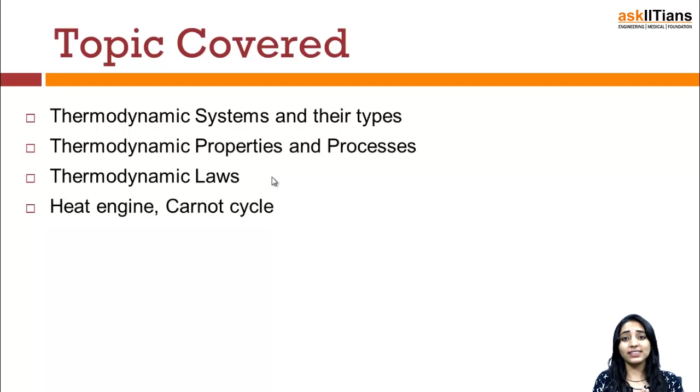Now, after studying the laws, we'll study something of practical importance to us. And the stuff of practical importance covers the heat engine and the Carnot cycle. So now, as I have given you the details of whatever I'm going to discuss in this chapter, let me begin with the chapter.

So here comes the first part of the chapter, where we are going to discuss the basics of thermodynamics. Let me first of all tell you that thermodynamics is made up of two words. One is thermo and the other is dynamics. Now, thermo, as we all know, is related to thermal energy.

Thermal energy, again, at its core comes from something known as heat. And dynamics means flow. So dynamics actually means power; if I take the dictionary meaning, dynamics means power. So thermodynamics is basically that branch of science where we discuss the flow of heat change.

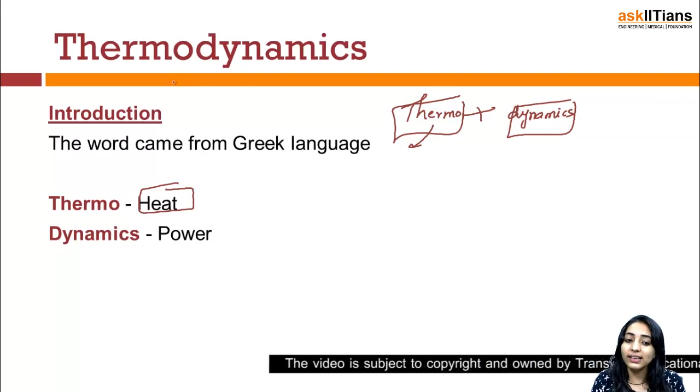Like how heat can be given into the system, and how heat can be given out of the system. This flow of heat into and out of the system is what is dealt with in thermodynamics. Now since we have covered the basic definition of thermodynamics, let me define system, surroundings and boundary.

Now as we know, to discuss any wide topic, we need to start with the core basics. So the core basics of thermodynamics deal with the system, the boundary and the surroundings. Let me take an example. Suppose there is a cup containing some coffee.

Now, if I say that the cup has got some coffee and I ask you to find out what is happening in that cup of coffee, that means I'm not concerned about what is happening outside the cup of coffee, like what is happening here. So if that is the case, I will say this cup of coffee is the system.

So that particular part of the universe which is under consideration for thermodynamic study is what is known as thermodynamic system. Now, the entire part of universe except the system is what is known as surroundings. So, I can very easily write that if you have a system and if you have surrounding, and if you are taking into account both the two things, this is what is known as universe.

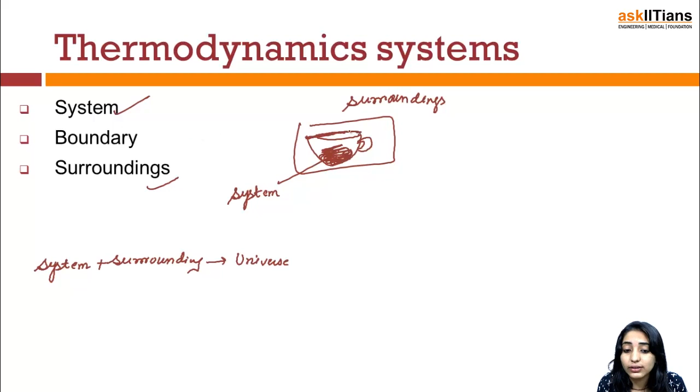That means if I try to divide the universe into smaller sections, I will say that part of the universe which is under thermodynamic consideration is called system. The part of universe other than system, which we are not concerned about whatever are the heat changes taking place, this is known as surrounding. Now, the phase which is actually separating the system from the surrounding is known as boundary. Now this boundary can be real, it can be imaginary. So we'll discuss more about boundary in the further coming slides.

Let me move ahead. So as I have taken the example of a cup, here also, for example, there is a system. You can consider this system as a cup of coffee. So what can happen is either in the system you can put some energy, or you can take out some energy from the system. You can do the entry of matter into the system. You can do the exit of matter from the system. That means either heat or matter can be either added or removed from the system. So these are the different kinds of work being done in the system.

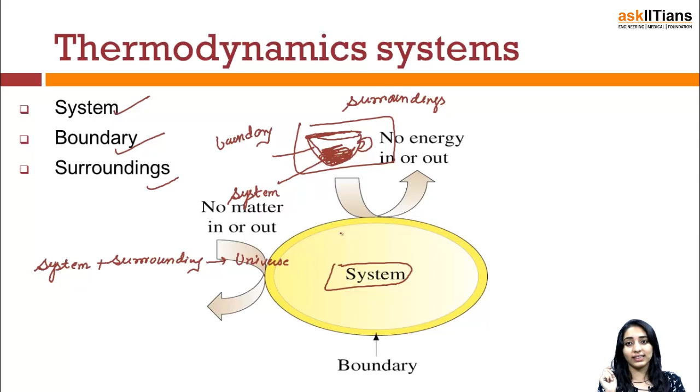Now if I move ahead, let's define what we mean by system. So as I told you in the previous slide, a thermodynamic system is defined as a definite space or a definite area on which the study of energy transfer and energy conversions is made. This is what I have discussed in the previous slide. What is boundary? The system and the surrounding, as I told you, are separated by boundary. Now the boundary may be fixed, or it may be movable, or it may be real, or it may

be imaginary. If I am talking about imaginary boundary, you can take the example that this was a cup. Now here this boundary of the cup is a real boundary, and it is solid. That means you have a fixed boundary and a real boundary. But at this top part, there is nothing to separate the air from the coffee. So I am considering a kind of dotted imaginary boundary. And hence, with this example, it has been shown that a boundary can be fixed, it can be real, it can be imaginary, or it can be movable.

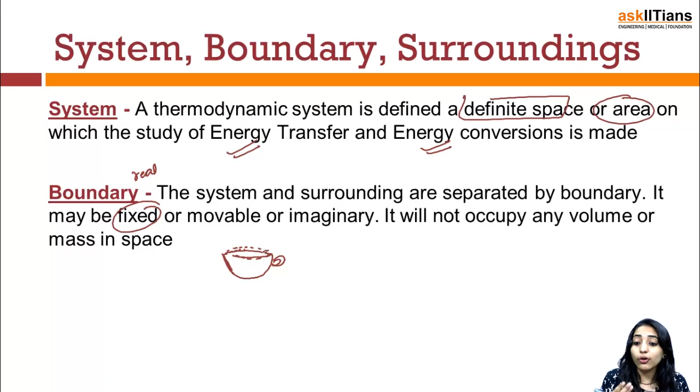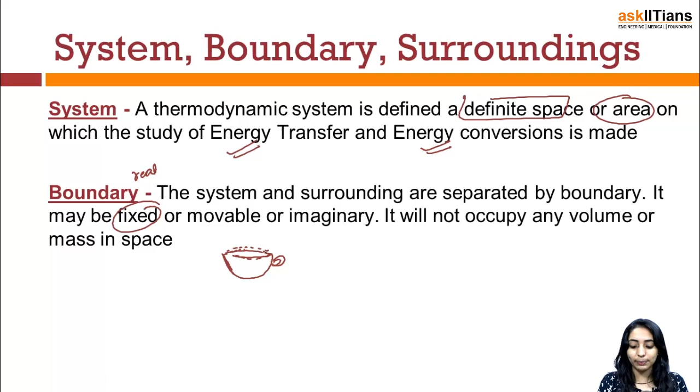So it will not occupy any volume or mass in the space, because it has been assumed that the boundary is such a sleek thing which just separates the system from the surroundings. So it is not supposed to occupy any mass or volume in the space. Moving ahead, let us come over to what we mean by surroundings. I said anything outside the system, but this thing which is outside the system is genuinely going to affect the behavior of the system. This is what is known as surrounding.

For example, if I'm taking a cup of coffee and I'm holding it in one of my hands, this thing is a boundary, this thing is the surrounding, and the cup was the system. The other case I can take, I am in my home and I am holding a cup of coffee. So me sitting here and holding a cup of coffee, or me sitting at my home and holding a cup of coffee, the system is still the same but the surrounding is different. So this is all about surrounding.

Now let us come over to two conceptual terms. One is control volume. Let me read the sentence for you first. A specified large number thermal device.

That means if I am taking any thermal device which has been specified, which can have a mass flow in or out of a system, it is called a control volume. So the volume over which you are working, which is taken into thermodynamic consideration, is the control volume.

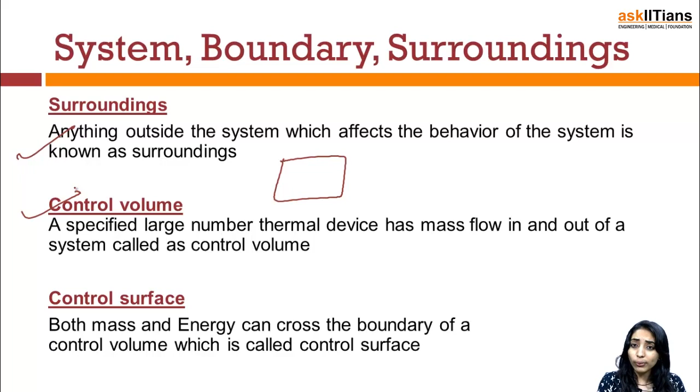Simultaneously, if I am defining control volume, on similar lines I can also define control surface. So in case of control surface, both mass and energy can cross the boundary of a control volume, which is called the control surface. Now we can have further discussion on these two things with the help of this diagram. So let me take each diagram one by one.

Now for example, you have taken a cup and poured some coffee in that cup. You know that the coffee gets cold after some time. You took a cup of hot coffee and placed it somewhere, and you will find that it becomes cool. So we can say that there was an exchange of matter plus energy with the surrounding. Why matter? Because some of the water vapors were moving away from the surface of the coffee into the atmosphere.

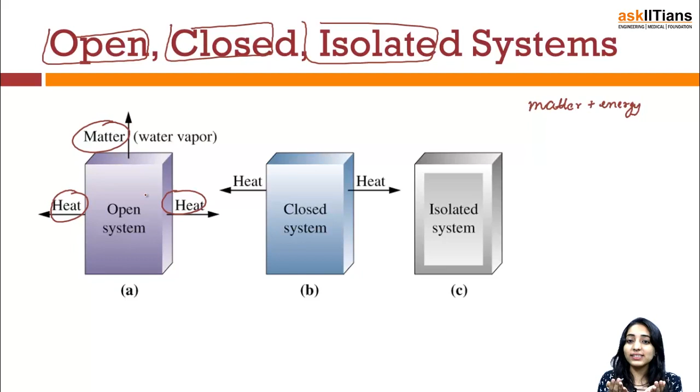So this was an exchange of matter, and since energy has been lost by the coffee cup to the surrounding, there was an exchange of energy too. So I can say that any system where both the matter and the heat are being exchanged between the system and the surrounding is called an open system.

Now just imagine I covered the top of the cup with a plate. That means after 5 minutes the coffee will be cold, but none of the water vapors are going to escape from the cup of coffee, right? So if only heat gets exchanged between the system and the surrounding, with no exchange of matter between the system and surroundings, such are called closed systems.

And now suppose I have taken a very good quality thermos flask and kept my coffee there. Then it doesn't become cold after some time, right? So any system in which there is no exchange of matter and no exchange of energy is known as an isolated system.

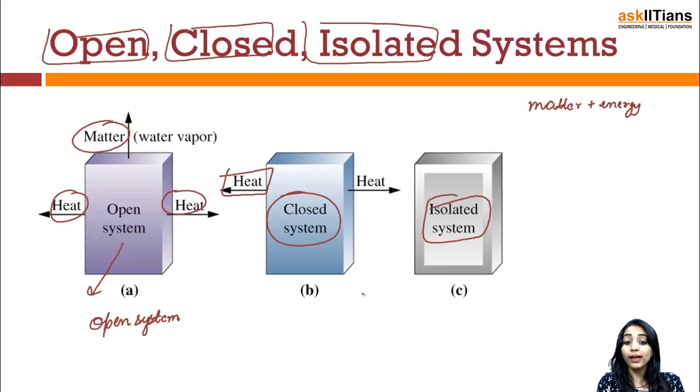I completely agree that no thermos flask has been discovered which acts 100% as isolated, but as an approximation, a good quality thermos flask will act as an isolated system. So I think now the concept of open, closed and isolated systems is clear. Let me read all the definitions one by one.

So an open system is the one in which both energy and mass cross over the boundaries of the system. A closed system is the one in which there is exchange of only energy and no exchange of mass between the system and the surrounding through the boundary. And isolated systems are those where neither mass nor energy can cross the boundary of the system.

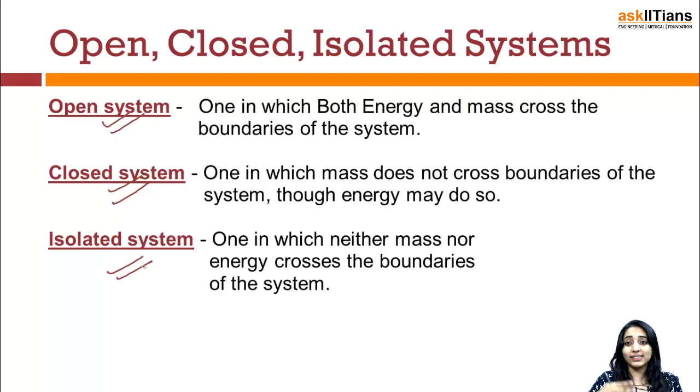So once we are done with this, it's time to move over to some good topic. Let's take an illustration. Now we'll go over to some examples so that we can apply the stuff we have understood.

It says, water is used as a coolant in the radiators of engines in motor vehicles because... So what is basically said in the question is that if you have a motor vehicle, then in the motor vehicle, the radiators, the engines...

So the radiators of the engine have water as a coolant. Now what is the purpose of water being used as a coolant? The options available to us: water has high thermal capacity, easy availability — this is not a correct option for sure. Low density of water is again not going to do anything related to thermodynamics, and low boiling point also. So these are the wrong options. The correct option is high thermal capacity.

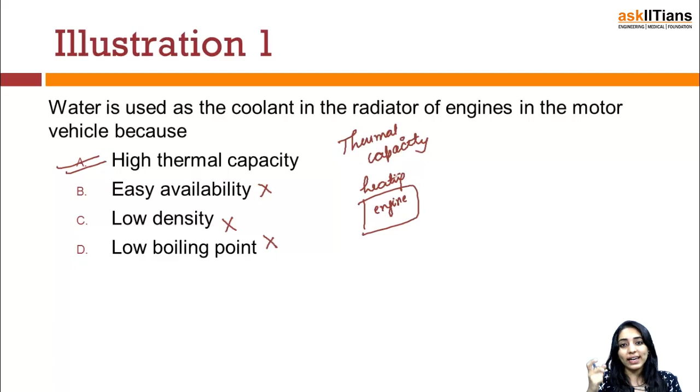So now let me first of all discuss what we mean by thermal capacity. See, if this is an engine, we know that some work is done by the engine, so there will be heating produced. So there are heating effects and the engine gets heated up. Now if the engine is heated up, we surround it with a radiator and then fill water inside it. So whatever amount of heat is released will be accepted by water, and water has a high thermal capacity.

This means what? To raise the temperature of water by a given amount, you need to supply a large amount of heat to the water. That means water will act as a good coolant because all the heat released by the engine will be absorbed by water, and hence the engine can work more effectively. So this was the first illustration.

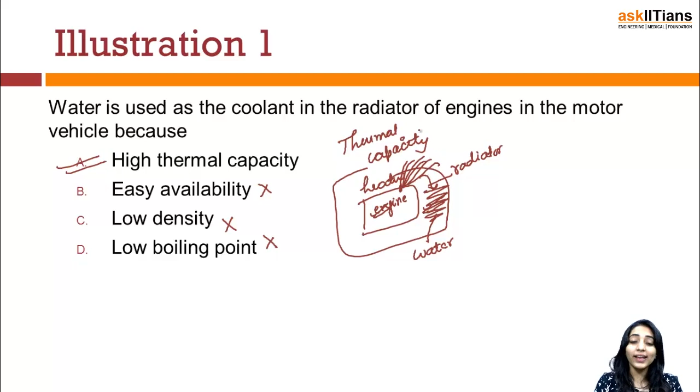Let me come over to the second illustration, which says the best material for a cooking utensil is one. Now what do you have? A cooking utensil in which you have kept some food which needs to be cooked, and you are heating it. So what is the best material for a cooking utensil? High specific heat and high conductivity is wrong because high specific heat is not required. High specific heat and low conductivity, again wrong. Low specific heat and high conductivity is the correct option.

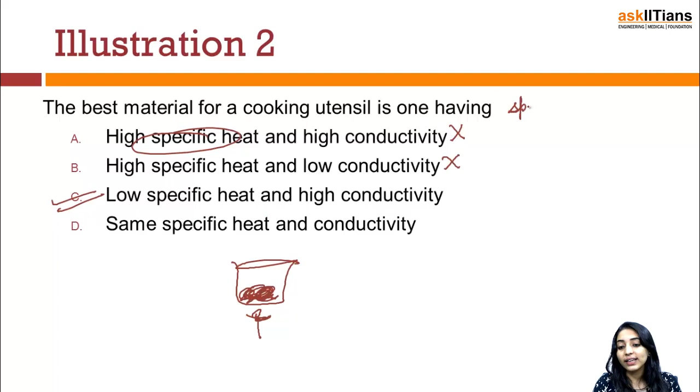Now what do we mean by specific heat? See, if you have a utensil, you keep your food over here and you heat it, you are cooking the food. So the basic purpose is whatever amount of heat you provide should go to the food so that it gets cooked. For this to happen, you actually need high conductivity. Only then will the heat be transferred from the utensil to the food. So the third option, second part, is okay.

Now coming to the first part, low specific heat. Why do we need a low specific heat? Specific heat is the amount of heat required to raise the temperature of a given body by a particular degree. So if you use a utensil with a low specific heat, only a small amount of heat is required for the utensil to heat up. If the utensil heats up nicely, all the heat will be transferred to the food and the food can be cooked nicely. So option C is the correct option for the best material for the cooking utensil. We'll be discussing more in the further slides.

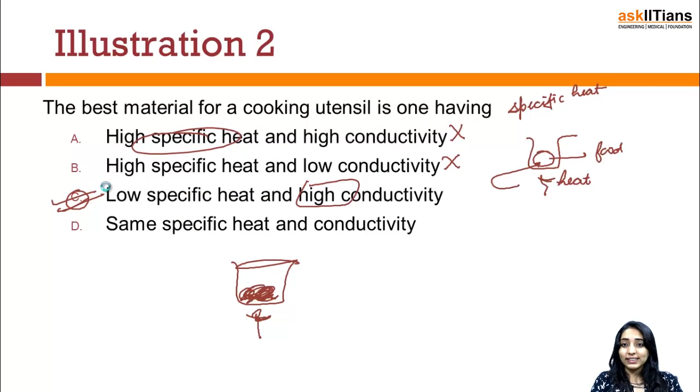So students, this was all I wanted to discuss with you regarding what we mean by system and surroundings. Since we are now clear about system and surroundings, the basic part of thermodynamics is clear to us. In the next part I will tell you about the different kinds of processes, what we mean by equilibrium, and the different kinds of equilibrium which take place in thermodynamics.